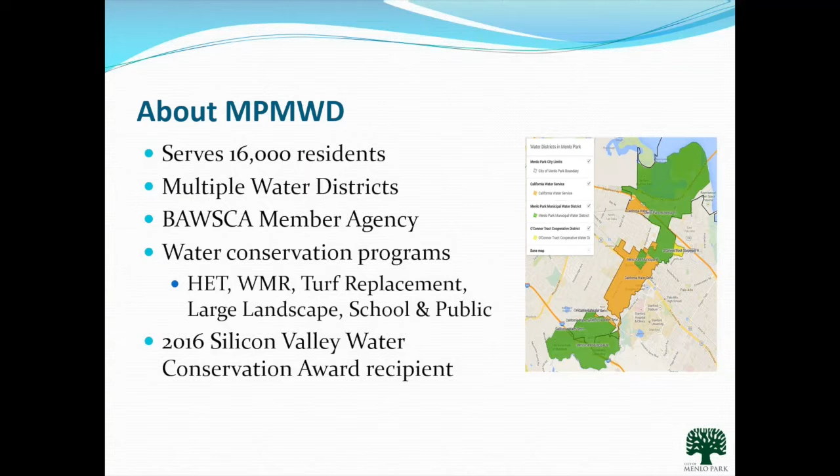A little bit of background on how Conserve-A-Scape was created: we began implementing the Lawn Be Gone rebate program in fiscal year 2012-2013. Back then we had only 2 participants, and we were trying to figure out how we can get people more interested in the program. We also realized that it may take a while for folks to get familiar with the program, and that landscape design and converting your landscape can be a significant cost.

Going into fiscal year 13-14, we only had 5 participants, so we really wanted to change that. We called and surveyed the previous participants for some feedback, and we identified that landscape design was the greatest barrier.

A lot of folks were interested in the program and had the budget to do so, but they were getting stuck after our pre-inspection phase, which is when they need to design what their vision is going to look like. They're really excited about it, but the execution was really hard to envision. So as the next step, staff went back to City Council to request approval for the development of a new program for landscape design to fill that gap in education.

We also realized that homeowners may not have the knowledge or know-how to go from a lawn to what you see in the picture here as an example, putting in plant palettes that work together, putting together an efficient irrigation system that would make sure those plants thrive for a very long time.

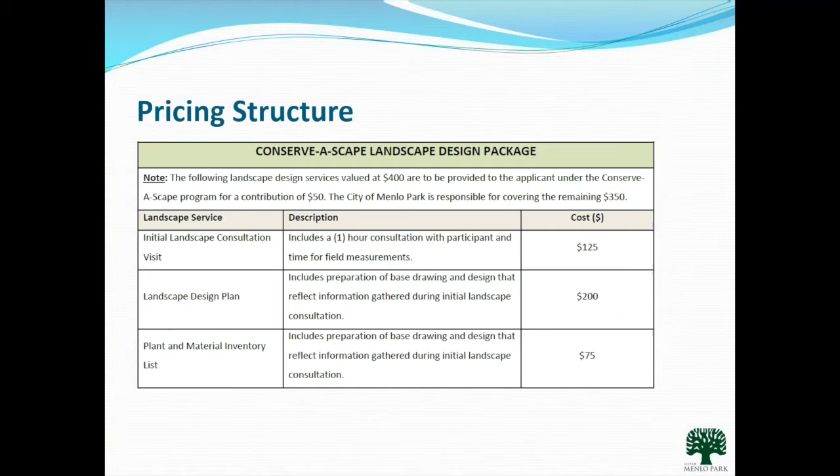We did want to allow some flexibility in the program for additional services on top of the $400 that the city covers. This is for cases where the resident wants to go above and beyond the initial design plan provided to them, or wants more of an extended scope.

What would warrant these additional charges would be, for example, if the resident gets their design and says it's not quite what I was looking for, I want it completely redrawn. We do allow that with additional costs and services — a complete redraw would be around $150. Any of these additional services would have to be covered at the expense of the resident.

For example, the city has a water efficient landscaping ordinance in which 80% of the entire conversion has to consist of plants. So usually this review takes 2 to 3 weeks.

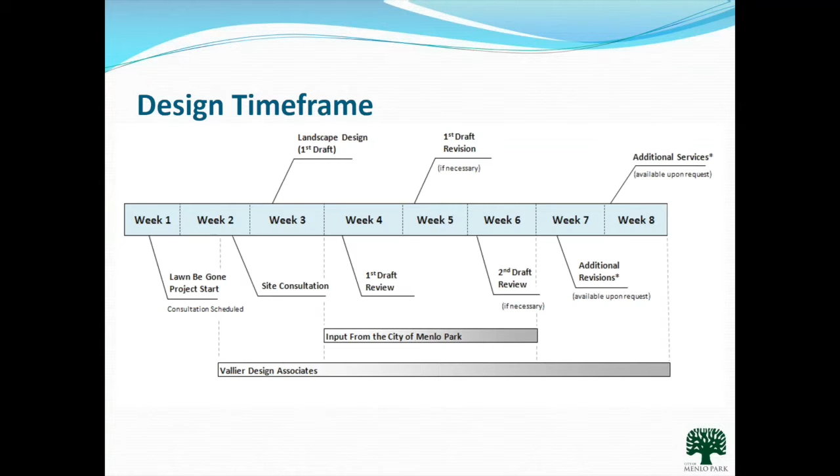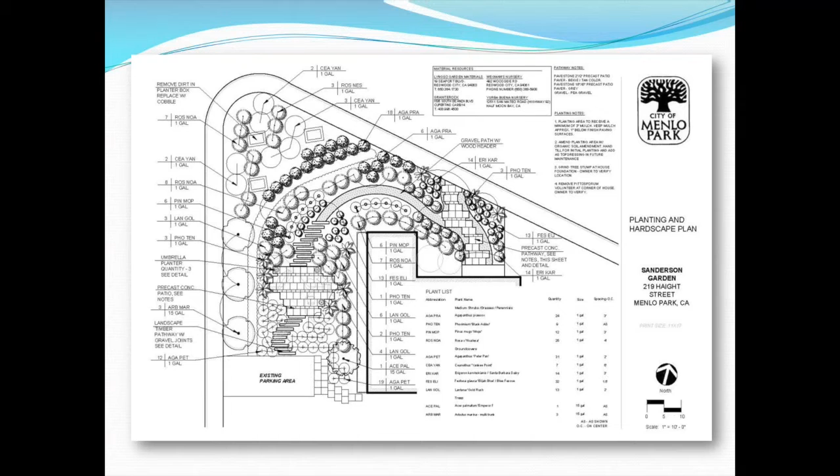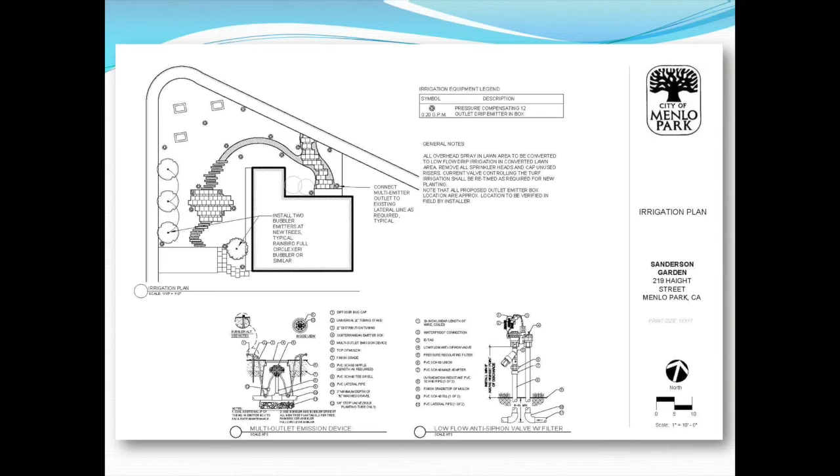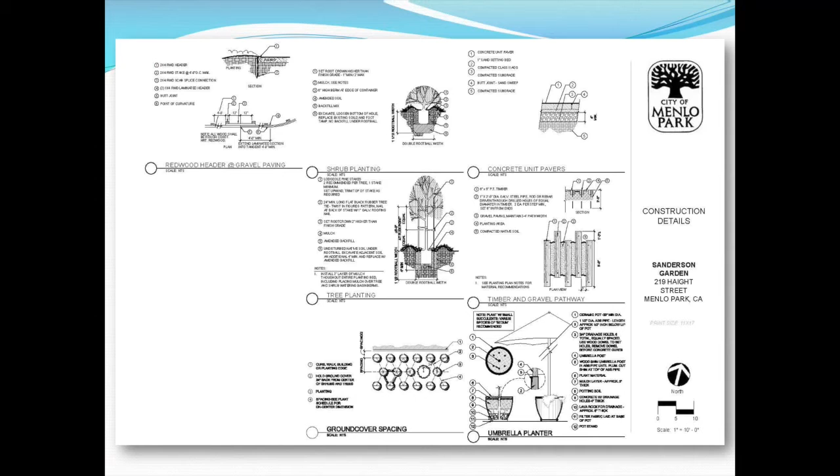There's also additional construction details if there are extra elements included in the plan, such as an umbrella planter shown on the bottom right of this construction detail sheet. Dry rock stream beds, for example, are very popular in our conversions, and sometimes there are details on how to include those, what type of rocks and spacing.

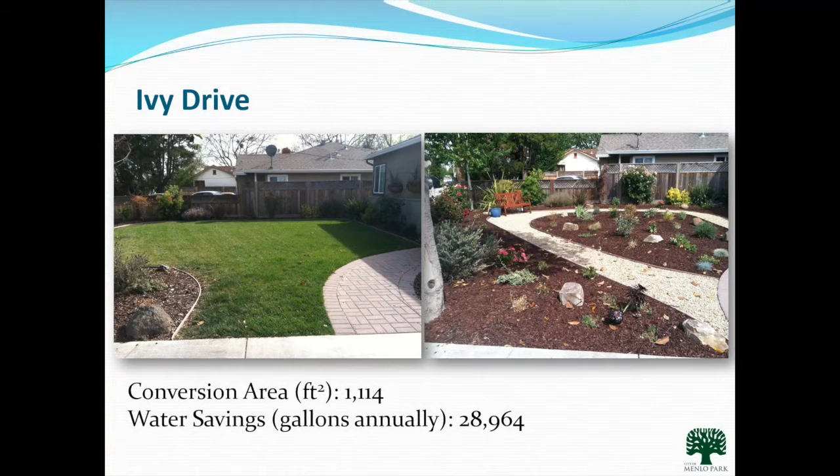The residents also let us know that a lot of neighbors have walked by, some of which have applications in the system to convert their lawn.

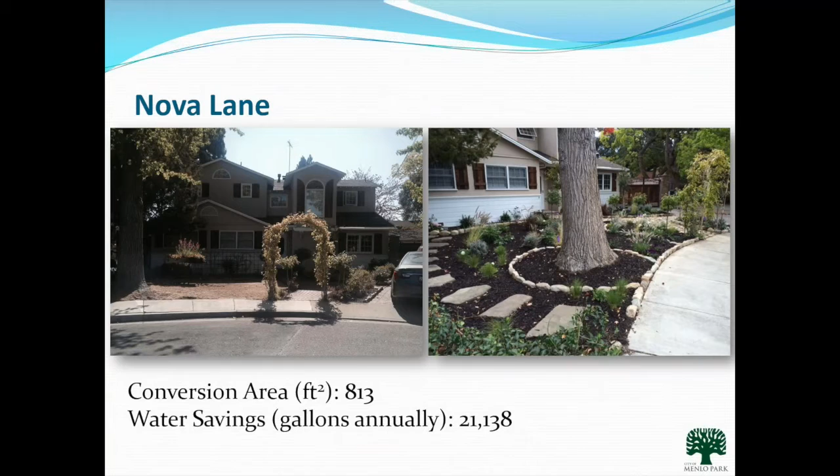There's different types of mulch you can use, different types of plants. Some folks have also incorporated edibles as well. They wanted to show a range of that.

Lawn Be Gone conversion participation, post-ConservaScape implementation. As previously mentioned, the first two years we had two and five residential projects completed. 2014 is when we started the ConservaScape program, and we got 11 participants. That has now jumped up to 40 residential participants, and it's not the end of the fiscal year. In these counts, I did not include projects that are currently in progress.

So, lessons learned and tips. We currently have the program set up to be a cluster. The consultant is in the San Rafael area, and so we initially decided to book two days out of the week, Tuesdays and Thursdays from 10 a.m. to about 2 p.m. for the appointments. We now understand that that's very cost prohibitive.

We wanted to be mindful of the consultant as well with the travel time. So what I suggest is, if there are other agencies interested in participating or starting a program such as this, maybe employ someone local that can either be on call, or when you go out and look at the bids, maybe employ more than one consultant.

Establish clear program guidelines. The lawn conversion process can be overwhelming, which we've been told, and we want to make it as easy as possible. Most of our outreach, it used to be we want to get all the details in there, but it's now been broken down to a minimum of 5 steps, and here's the references if you want to further look into the terms, so as not to overwhelm people up front.

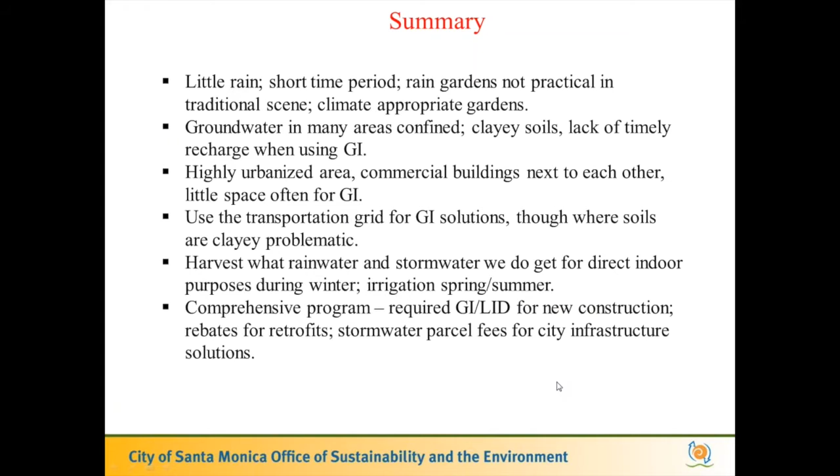Thank you, Neil. Neil is the Watershed Section Supervisor and Watershed Management Coordinator for the City of Santa Monica. He works for their Office of Sustainability and the Environment. He's been with the City of Santa Monica since 1999, so he knows what's going on in the city. On the side, he also is on the editorial board for the Watershed Science Bulletin. In City of Santa Monica, he oversees water conservation and efficiency programs. He also does watershed management programs. Everything he does is geared towards reducing water pollution and using water sustainably.

Before joining the City of Santa Monica, he was with the Jacques Cousteau Society for nearly a decade researching global water issues for different media. So without further ado, this is Neil Shapiro talking about water capture, use, and quality. Thank you.

Great. Thank you for inviting me. Thank CivicSpark and the group for having me. Love to talk about all the stuff that I'm involved in. And we have a similar program to what Vanessa talked about in Menlo Park. We have an extensive water conservation program run by a different section of colleagues, so there's lots of information about that on our website. So I'm going to talk about managing our watershed and stormwater rainwater harvesting in our city. That's my focus.

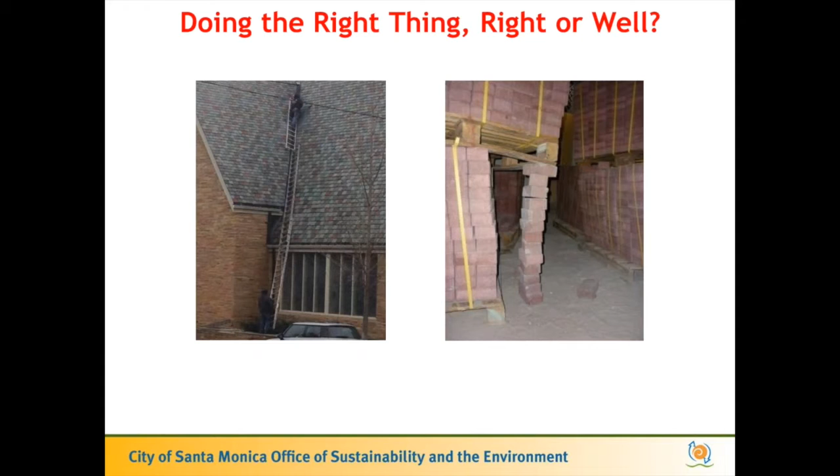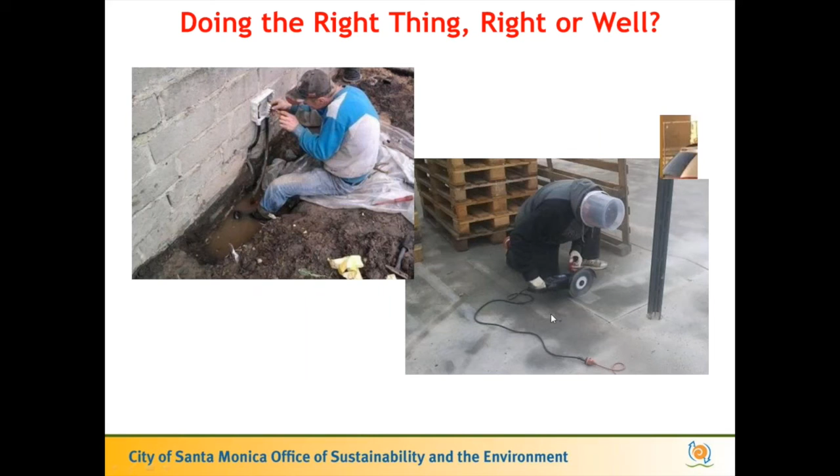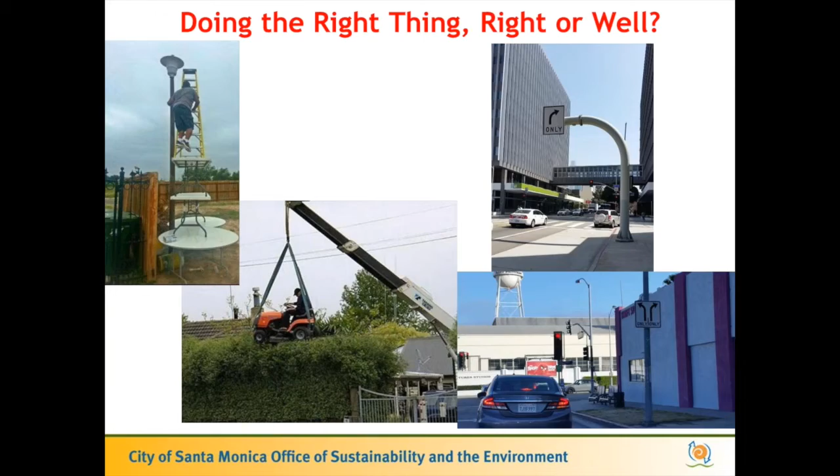So I'll talk introduction to the problem, and then I'll talk about different approaches we have, and I'll show you lots of examples. And I know I have a short amount of time, but I'll show you lots of examples of things that we're doing in our city.

So we're all familiar with, cities have paved over, urban areas have paved over the land, and as a result, when it rains, most of the rainwater now flows off into our surface water bodies and cannot percolate into the ground and into groundwater. So that's become a problem, and it carries pollutants. And there's been lots of studies around the country documenting that urban runoff is the single largest source of water pollution in our country. So that's a significant problem, certainly for our city.

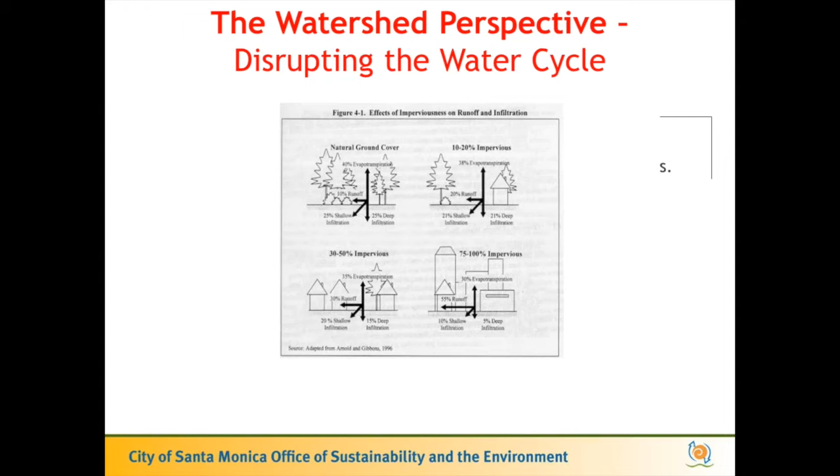We're a beach community. We depend on a clean beach, clean waters for people coming, visitors, and tourism coming and helping our economy. Our city, for those who may not know, we're right on the ocean, Santa Monica Bay, surrounded on three sides by Los Angeles. Highly urbanized. We can't expand our city, so any construction is just new construction to replace buildings. We have separate sanitary sewer and stormwater systems, so we don't have a combined system.

There are a number of TMDLs for our area that have a lot of different requirements, which maybe the next speaker might talk about in terms of requirements for the stormwater permit, NPDES permit. And we don't get very much rain here. And so we want to make sure we maximize the limited water resources we have and try and maximize the local on-site water resources we have.

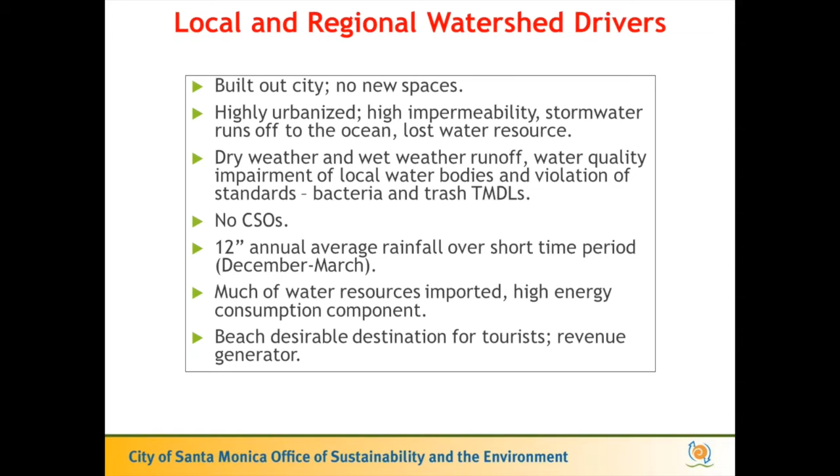So when we look at solutions, or at least in my area, we want to look for solutions that have multiple benefits. So for example, in the mid-'80s, early '90s, when we were complying with various regulations for stormwater, everyone was looking for a solution that dealt with water quality, treat the water, discharge it. However, there are solutions that can take care of both problems, and that's where we get into low impact development, design strategy, green infrastructure solutions. And this is an example here.

NRDC did a study looking at different solutions where you can harvest your on-site water, treat it, use it on-site, don't discharge it, and that way you solve water quality and water quantity problems. So that's our strategy in our city. We want to mimic nature, work with the water cycle, use all these latest sustainable technologies and design strategies to be proactive in protecting our watershed. Don't look at stormwater as a waste product, but as a resource. And so focusing on solutions that give us lots of benefits.

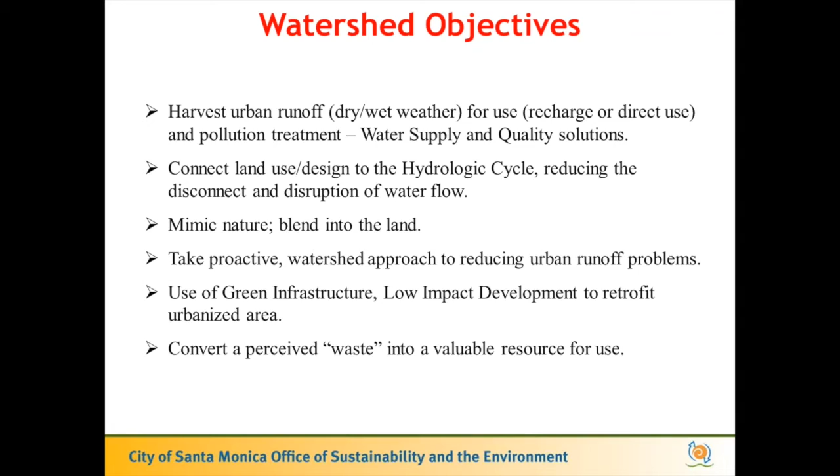And to help me do that kind of work, we have our urban runoff mitigation ordinance that we've had since the mid-90s, and all this is available online on our website and our municipal code. So anyone who's doing new construction or major construction, they have to construct a post-construction BMP, a structure to collect the rainwater and keep it on site. And then we have 2 stormwater parcel fees in our city that bring in about $4 million a year that help us do a lot of our programs to keep our ocean waters clean.

Like most cities, probably around the country, certainly in California, back in the late 80s, early 90s through the 90s, we started at the bottom of this hierarchy of solutions. Detention was the main solution, just hold the stormwater on site and then discharge it after it's dropped out sediment and any pollutants attached to that. Then we started getting into proprietary solutions. Companies started developing these separation screen filtering systems to remove gross solids and sediments.

Then we got into more complicated filtration. Then we started looking into plants to help filter, until we've worked up to the top of the hierarchy, where our focus is now on rainwater harvesting. As I said, that accomplishes both water quality and water quantity solutions, and it's the most sustainable solution. So that's where our programs are directed now.

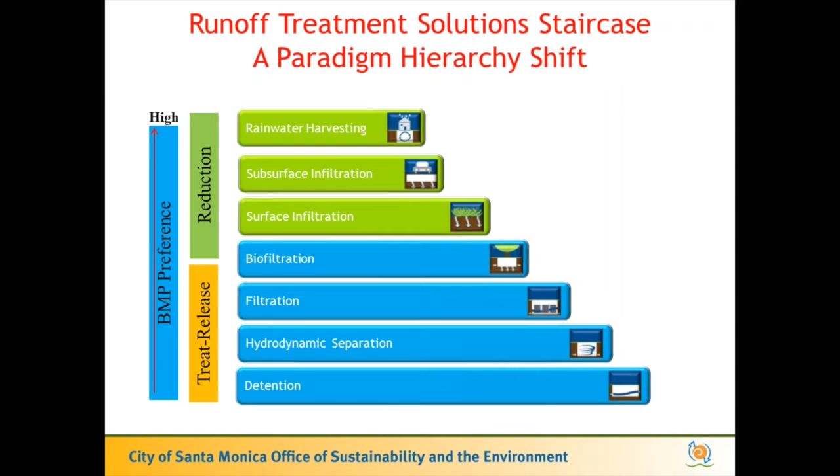And so I'll start by talking about some examples. These are passive examples where we just allow the water to be harvested and infiltrate into the ground. So we have an ongoing program for greening our alleys. We might do 10 to 20 alleys a year, just part of our regular CIP program, part of our regular capital improvement program where we're using alleys.

And when we do that, we're putting pervious concrete center swales, so as the water is flowing down the alley, whether it's just the alley water or the roofs of adjacent buildings, that water is going to go into this pervious concrete and soak into the ground. So you can see the top right, the sheen on the impervious asphalt, and then you don't see the sheen for the pervious concrete because the water is soaking in. So this is an ongoing program.

We're also going to be doing this at intersections where we have concrete swales going across these intersections, another good place where we can put the product and allow nuisance water to infiltrate into the ground, and also during storms, the rainwater go in.

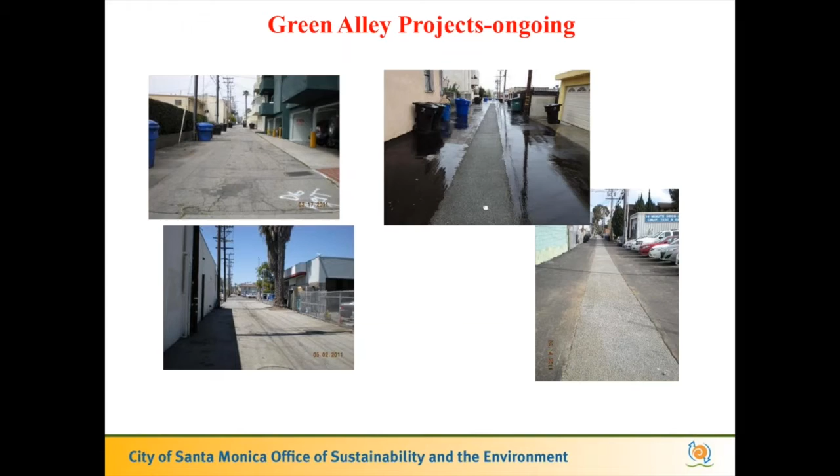We also have an ongoing program when we're redoing either streets or just the curb and gutter. We're putting in pervious concrete again. As the water sheet flows off the crowned streets, it obviously goes into the gutter, and all the water is right there, so it makes sense that we could have some percolation going on there to get that water back into the ground.

This is an important maintenance point: since most of our streets are lined with trees, we get a lot of tree droppings, a lot of stuff coming off the streets. You want to make sure you have a good maintenance program, a good street sweeping or a vacuuming program so that these locations are cleaned properly at least once or twice a year, so you don't get sediment filling in the voids, and therefore the product will malfunction when you fill in those voids and you don't get percolation.

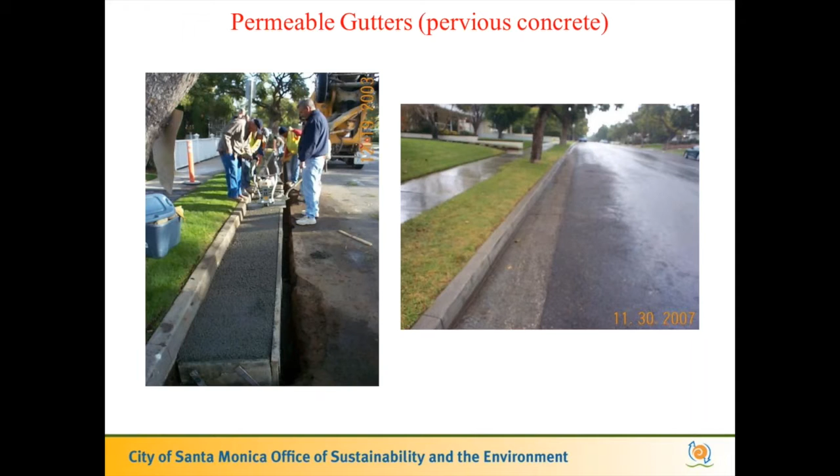We did a demonstration project many years ago where we looked for a narrow parkway here on the left side, and we had a gutter on the right side. This street is San Vicente on the north part of our city. Again, we thought, well, maybe we can harvest the water flowing down gutters instead of putting in pervious concrete. Just add a catch basin at a location at the bottom of a drainage area, collect the water through this catch basin on the right. It goes through an insert filter to filter out debris, sediment, and then the water, after it goes through that filter, goes into that infiltration zone under the parkway.

So in this case, it's filled in with these plastic boxes. There's a variety of products out there, and I'll show you examples shortly. So instead of using rock, we use these plastic products. So that way we get 95% void, and then we can store more water in them. So successful in demonstrating that strategy of extracting stormwater flowing in the gutter and putting it either in the parkway or perhaps somewhere else.

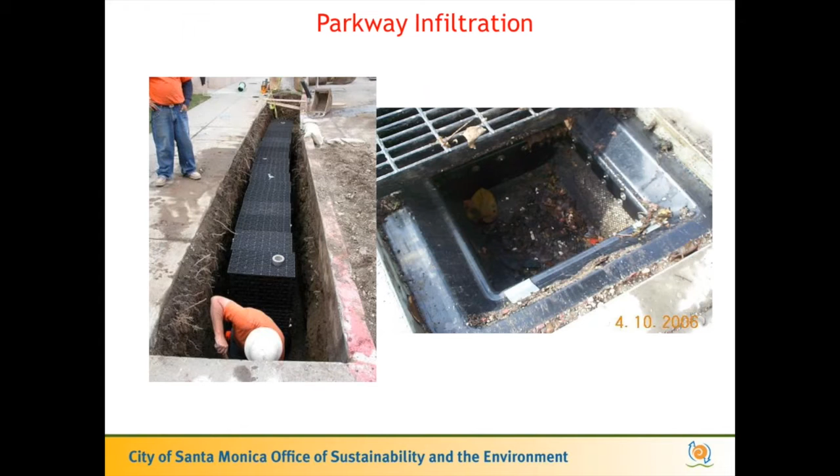And so that somewhere else, we got a grant recently from the state to do what we call an inline stormwater harvesting program. We selected 3 sites in the city. This slide is showing 2 of the sites in one residential area. So instead of adding a catch basin, which is what the previous slide showed, we found existing catch basins. The bottom left shows the existing catch basin, and we tapped in that catch basin, modified it with a little diversion, and so when the stormwater comes off the gutter in the storm drain, it's diverted not into the pipe that goes in the storm drain system, but it goes into an infiltration zone.

Top left picture, which was similar to the previous slide, where the water can infiltrate underneath the parkway. And the middle slide is just showing some of the monitoring and access points for that. We had to do a bunch of monitoring of storms to show that this was an effective solution.

On the right side, we tested another strategy. Instead of putting the water under the parkway, we actually augered down, top right slide. You can see the manhole cover, the utility cover, and that's an augered silo about 30 feet deep. So the water is removed from the storm drain. It's filtered of any trash and debris, and then the water goes into this 30-foot water silo and percolates into the ground.

And we have signage so that people in the area will see what's going on and learn what we're doing.

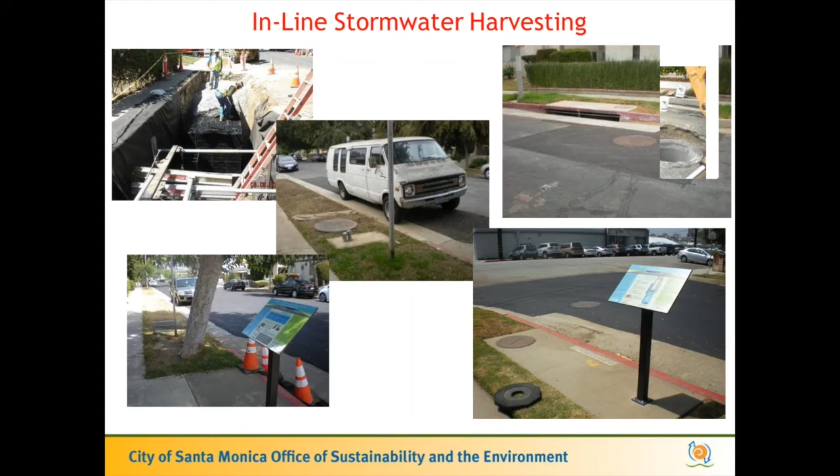The third location was on another part of the city, the south part. We actually tapped into the storm drain line, not a catch basin. The bottom left slide highlights the utility cover, where the storm drain makes a turn coming from an alley onto Hill Street. We diverted the water out of this pipe, and the middle top slide shows this diversion, a little dam where the water is removed from the storm drain line and sent to the left.

We have two augered pits, shown top right. The first removes trash and debris, and the second is our infiltration zone. The left top slide shows the augered water silo. The bottom right again shows some signage, and this car is covering over where that infiltration zone is. We think this is a very effective solution and look forward to doing many more of these.

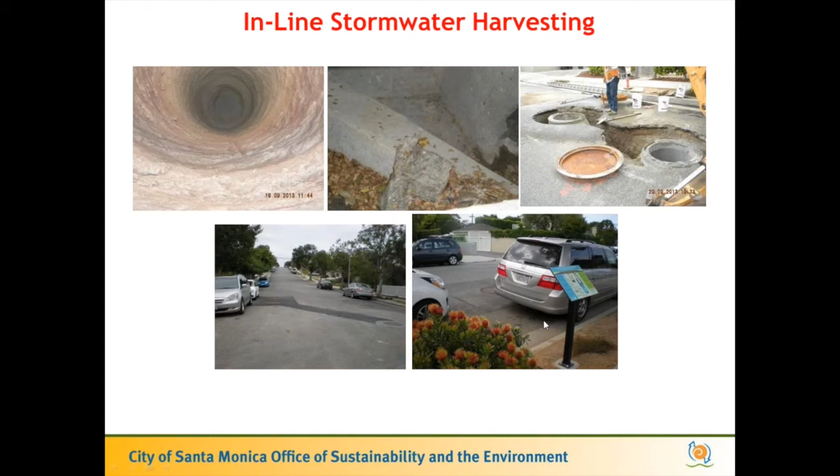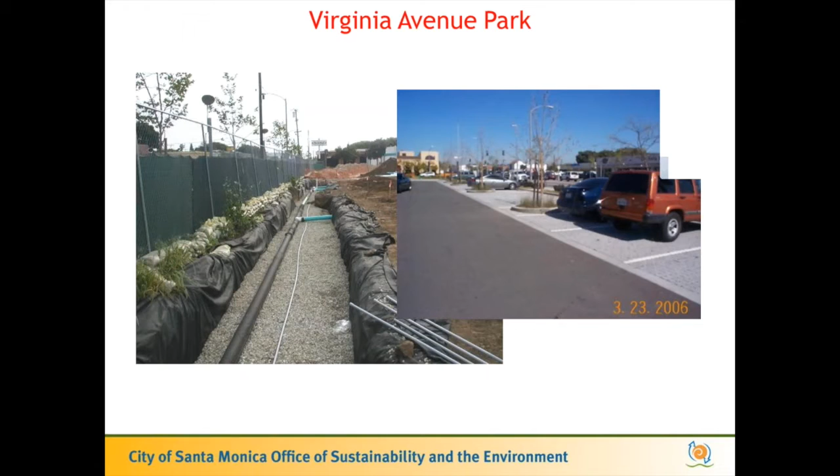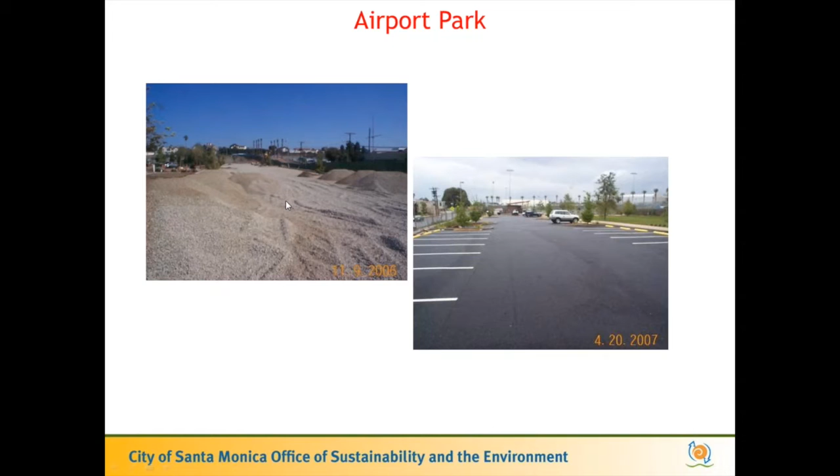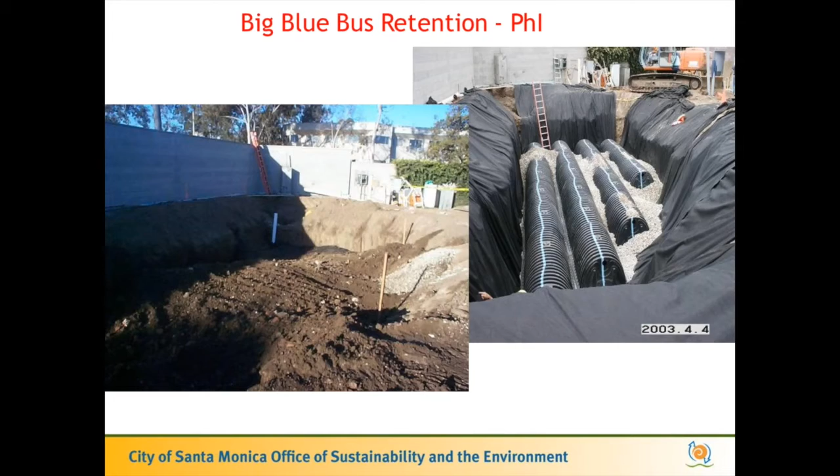Our city has its own Big Blue Bus transit system, so we rebuilt the facility over two phases. The first phase, at one end, included a big infiltration zone to collect rainwater coming off some of the hard surfaces and buildings. A couple years later, they redid about two-thirds of the other end, where all the buses are parked, along with additional facilities.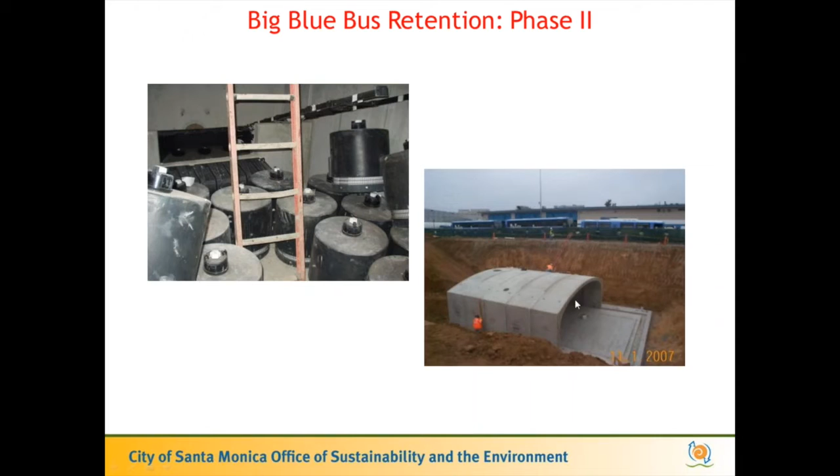They put in a dual system that includes, top left, a storm filter—all these canisters have different media in them to filter out a variety of pollutants such as heavy metals, which would be more common at this type of facility. After that, the water is detained in a concrete vault, and from there it's bled off into an infiltration zone where it infiltrates into the ground.

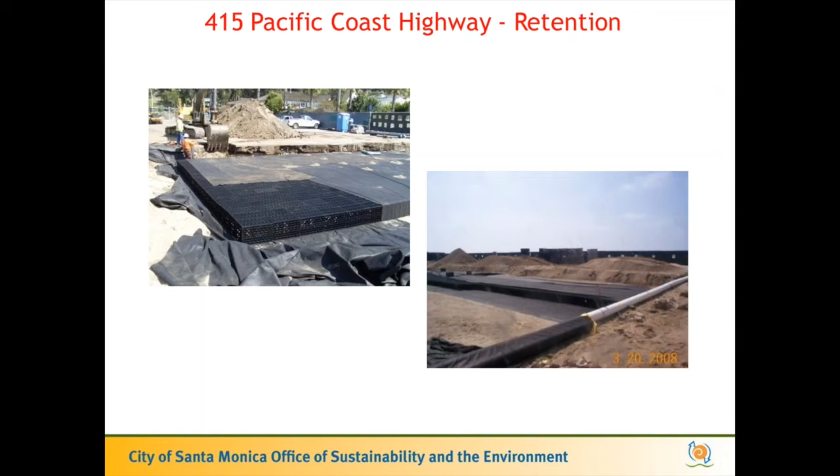There's the Annenberg facility, a kind of famous facility on our beach used for a variety of activities. There's an infiltration zone actually in the beach and sandy area, so good percolation, and all the stormwater coming off that facility gets infiltrated there.

We got another grant to test out converting some parking lots into a more permeable, multi-beneficial use facility. In our city we have a number of parks, but because we're built out we can't add any more, and we really want to increase the ability of people to recreate around the city. So we converted one-third of this beach parking lot.

We removed the asphalt and put in a product called Netlon, a grassy product with a base that makes it structurally sound so you can park on it. When it's not used for parking, which is most of the year, we prevent cars from parking on it, and people can do a variety of sports or activities, or just relax there.

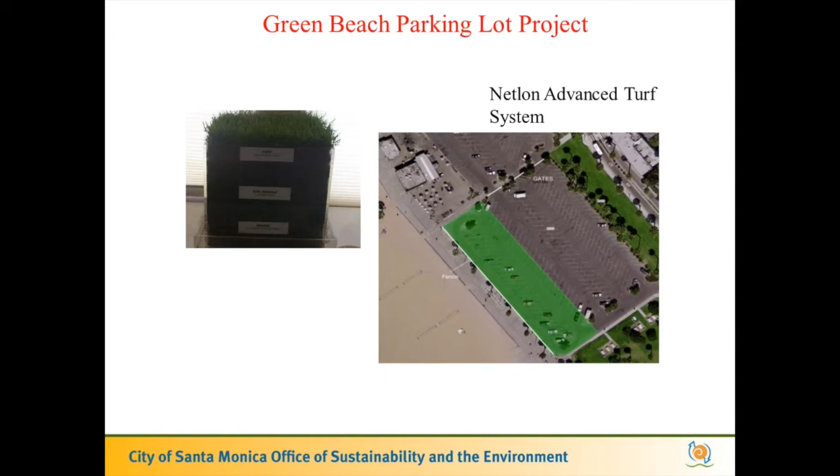We didn't get enough money from the grant, so we didn't put in a cistern, but it would have been nice because we actually added more turf to the facility, which means more watering. That goes against our strategy of being more water efficient, although it does have an efficient irrigation system. That's something to keep in mind, where you have to balance the various needs of a city.

Here are other examples of different plastic products. I've put the names of them in case you want to look them up, and there's information on our website about them. So again, all kinds of different products are out there.

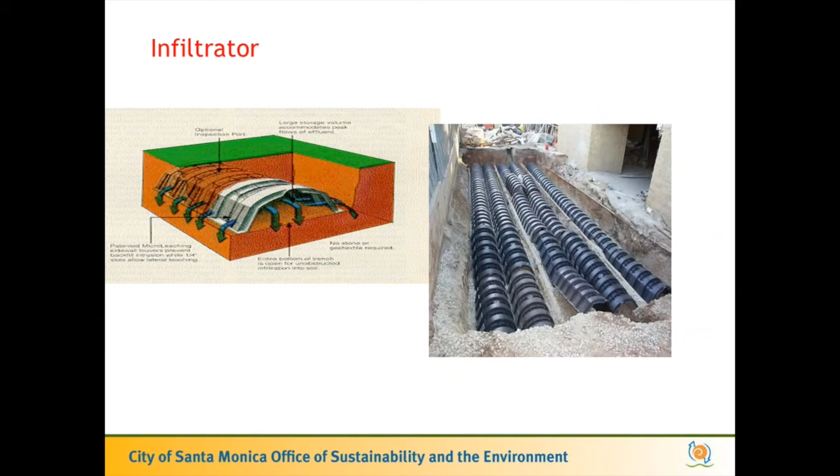These plastic boxes I've been showing can have a shallow footprint or a deep, big footprint for installation, or you can have a shallow depth but a big footprint with these concave products that are very effective. It just depends on your site, and you want to tailor your products to it. With this one, you can actually stack the concave devices after you backfill with gravel.

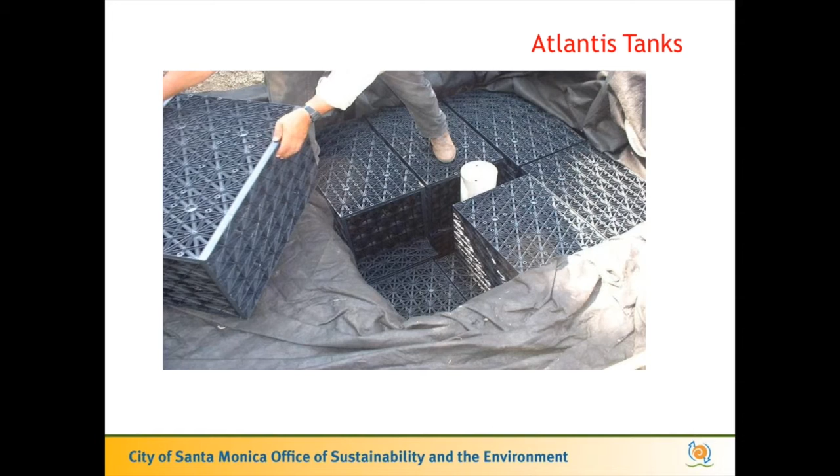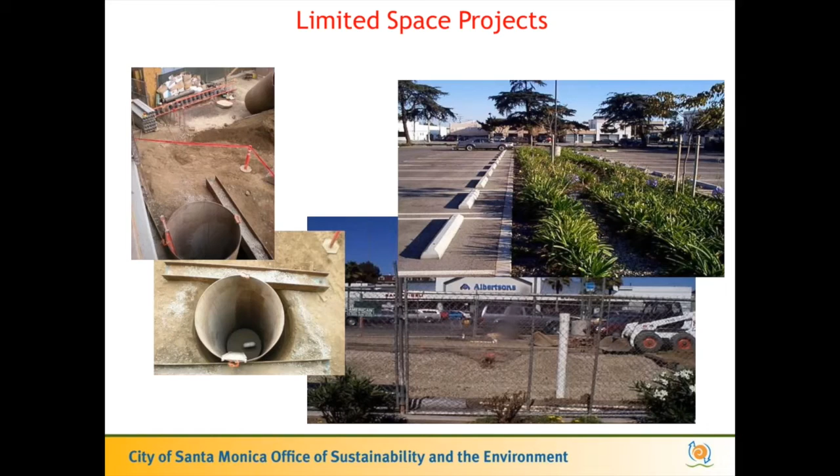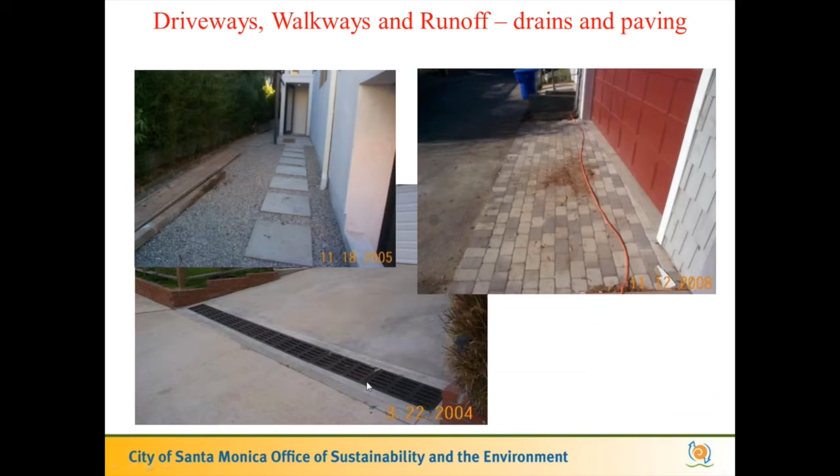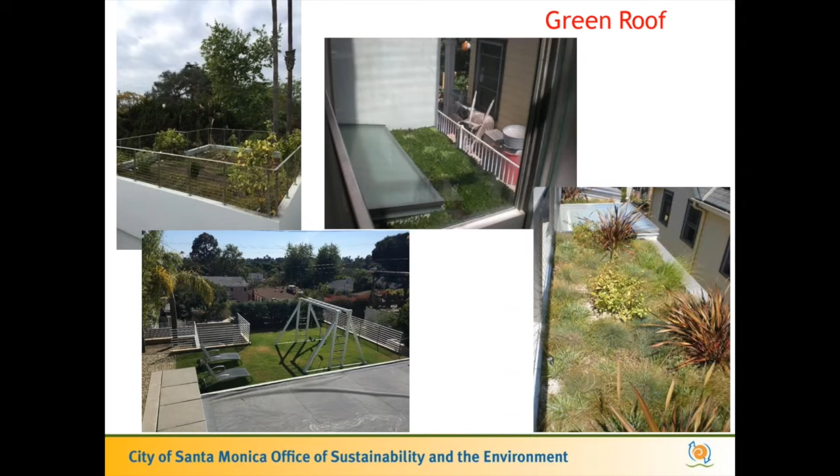We're starting to get some green roofs in our city. These aren't as practical a solution because, depending on what you plant them with, you may have to irrigate them during the dry season, which requires more water, so you have to think carefully about that. If you put in a cistern to collect the water and then use drip irrigation, you can obviously water your green roof during the dry season.

As we move away from passive solutions and into more direct or active solutions to keep the water on site and use it for beneficial purposes, besides requiring people to install these during construction, for retrofits we also offer rebates to redirect your downspout. Here, different downspouts have been disconnected from pipes that go to the curb and instead send the water to the landscape. This is still a passive solution, but we pay up to $40 for that.

We also have rebates for rain barrels and cisterns. For rain barrels, we give up to $200. For small cisterns, $500. For larger cisterns, we give up to $2,000.

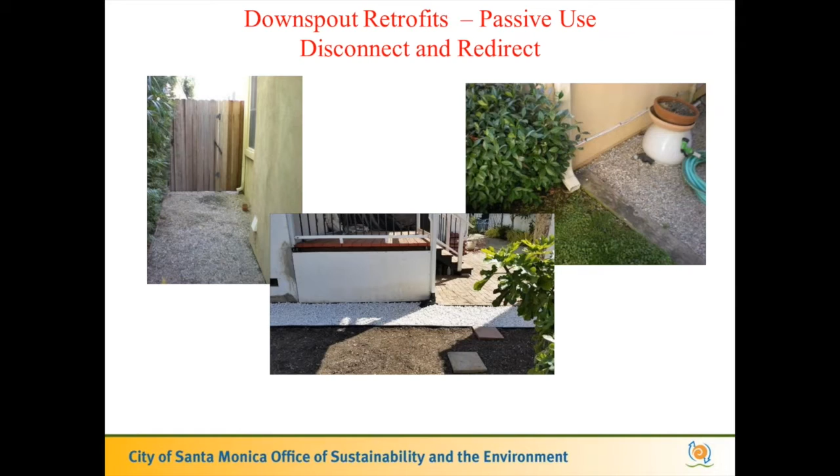Again, the water can be collected on site and used for landscape irrigation, and these come in all kinds of different shapes and sizes. You've probably seen that. The one on the top right is kind of cool, it's a slimline. So if you don't have a lot of space on the side of your property but still want access to it, you can put in this type of cistern; it hugs the wall and has a big footprint but doesn't stick out.

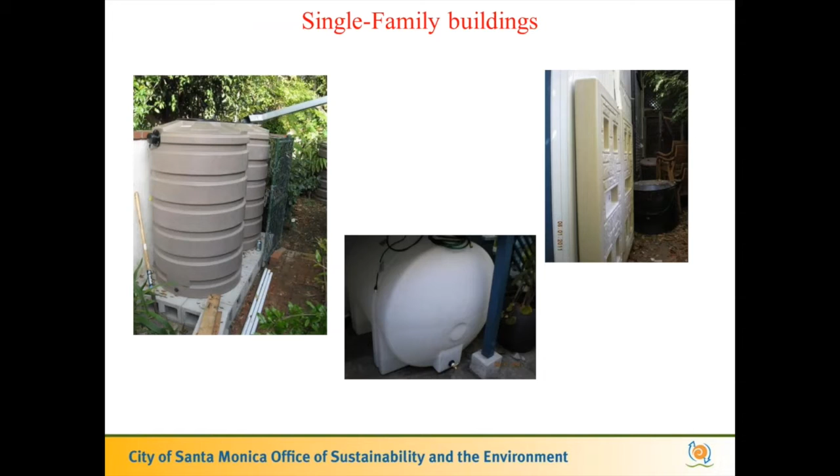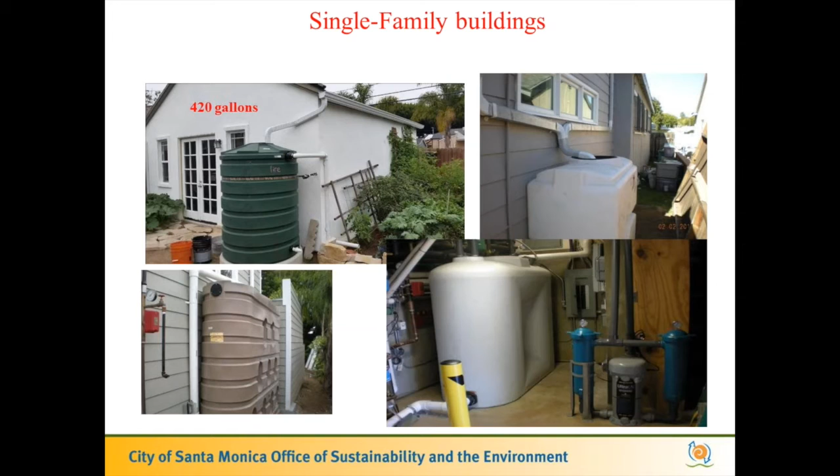All kinds of shapes and sizes, so a very successful program in our city putting these in. Some homes have been putting in 5,000-gallon cisterns to use the water for irrigation. This multifamily project actually uses plastic boxes as a 5,000-gallon cistern underneath the front of their property, used for landscape irrigation. This particular project matched the landscape plant species to the water needs from the cistern, so in theory they collect enough water from a couple storms to get them through the dry season.

Multifamily with a bunch of cisterns. This is our main library, where we put in a 200,000-gallon cistern to use the water for irrigation. We were going to use it for flushing too, but this was added at the end of the project, so we weren't able to get it in with the design team.

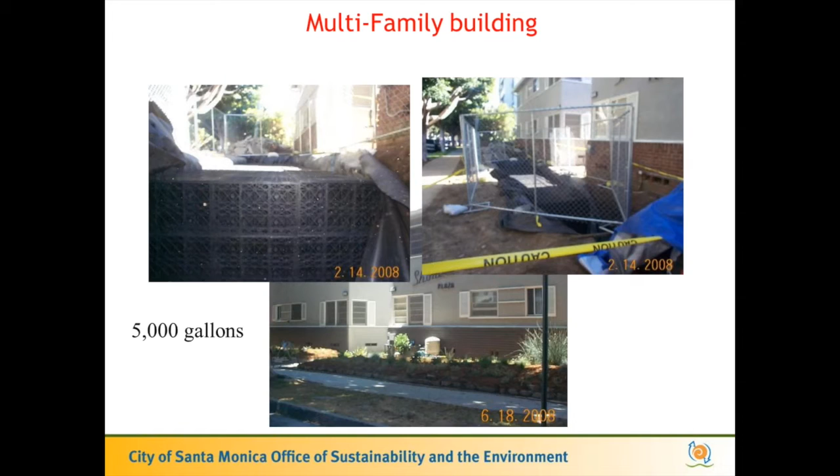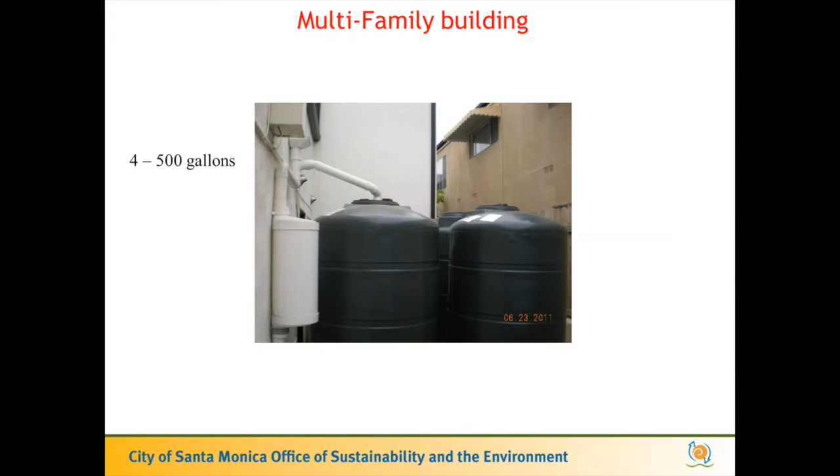Another city multifamily project has a 5,000 gallon cistern for irrigation. This is one of our latest projects, our new library, with a 12,000 gallon cistern where the water is used for indoor flushing only. We're very excited about this, we've kind of broken the barrier to actually using rainwater inside, which has been a challenge at LA County, dealing with our public health and public safety officials to get permission to do that.

This is a treatment system, and it goes through different systems: sand filter, microfiltration, disinfection. We also have signage and educational information to show people what's going on so they can learn about this.

We have a new light rail that goes through our city, just opened up a couple weeks ago, our Expo line, and they have a maintenance facility in our city. They put in a 400,000 gallon cistern system, and they use that water for high pressure cleaning of equipment.

We'll also be building another project at the end of this summer at Los Amigos Park. There's a storm drain that runs underneath the street right next to it, so we're going to tap into that, put the water in a big cistern, and use it for irrigating the field and for flushing the bathrooms at the athletic field.

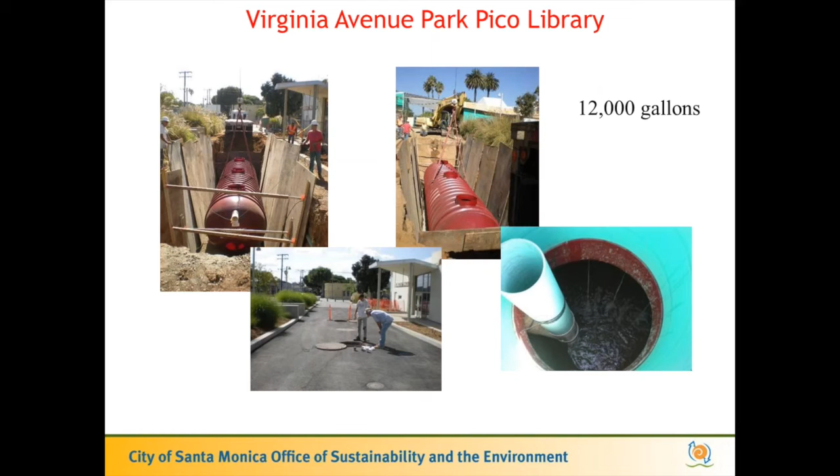Thank you, Megan, and it's an honor to be here. I'm just so impressed with every CivicSpark member I've met, and I'm so grateful for you all dedicating a year to community service.

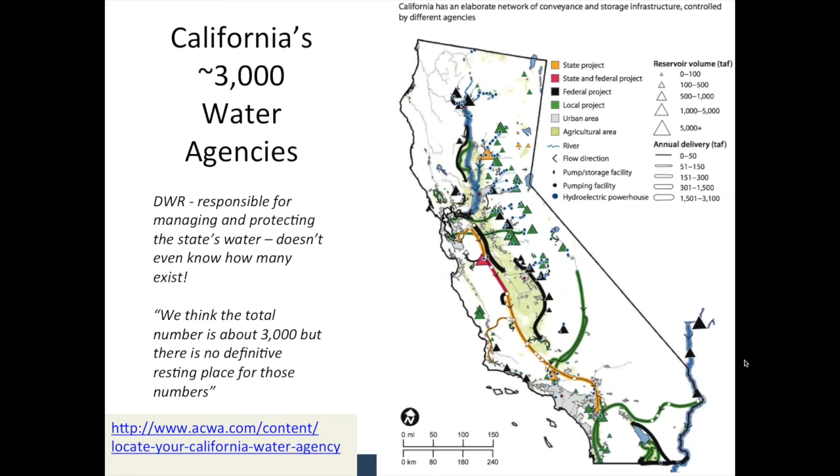So first, regarding local water supply and management, I'll give you a second to digest this map. California water management is incredibly complex. We actually have over 3,000 local water agencies in the state, and we don't know exactly how many there are. The Department of Water Resources, the statewide agency responsible for managing all these agencies, doesn't even have an accurate count, which is kind of scary for such an important resource. I had a professor in graduate school who liked to say that in California we hate big government so much that we'd rather create thousands of little ones. This is a perfect example of that. Every local municipality may have multiple water suppliers and multiple agencies managing every aspect of water management, from water supply, wastewater, water quality, ecosystem flows, you name it.

They have multiple agencies to cover every single potential use of water. But some of the most acute needs that local communities face are safe drinking water, reliable water supply for irrigation, reliable water supply for human or urban use, sewage contamination and wastewater treatment, stormwater mitigation, and demand management.

So I'll give you a brief overview of each of these. The first one being safe drinking water. There are many communities across the state, especially in the San Joaquin Valley and some of our more rural areas, that actually do not have access to safe, reliable drinking water. Some of those communities have had to go as far as to pay to truck in bottled water to provide to their residents because their aquifer is contaminated or the infrastructure they have is so old and deteriorated that the water is unsafe to drink.

Some of the more innovative solutions for addressing that issue are new technologies on the end user, so putting in some sort of treatment mechanism. There are very high-tech models and very low-tech models that can be installed in single-family homes, multifamily homes, and commercial buildings that will treat the water to drinking water quality on a regular basis.

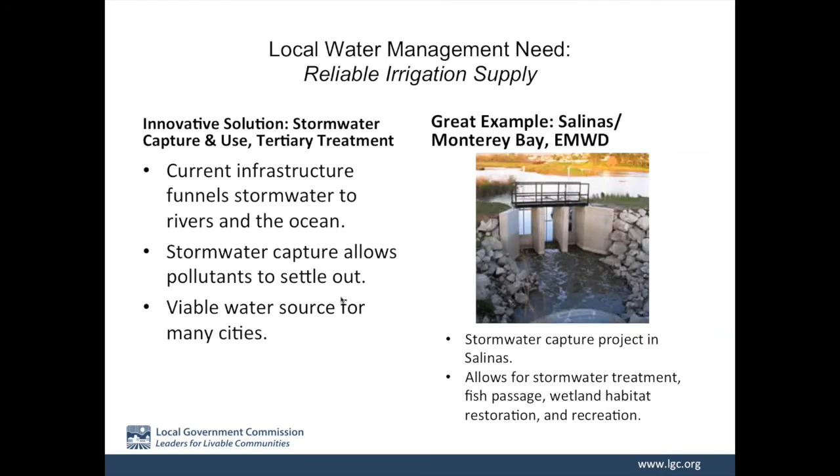A new technology that's very promising is the use of biodigesters, where they take the wastewater and separate the waste from it and turn that into an organic matter that can be added to fertilizers and become a very viable, high-quality fertilizing material. It also cleans up the water, and in the process creates combustible gas that you can then use for energy.

An example of this is in Sonoma County. St. Anthony's Organic Dairy Farm is producing enough biogas to almost run their entire farm's energy needs on the property, and also reusing the fertilizer to grow their crops.

Next is stormwater mitigation. Neil talked a great deal about this, so I won't spend a lot of time on it. Stormwater was considered a source of pollution in the state for a very long time. I think Neil expected me to go over the regulations that govern stormwater in the state. Because of time, I don't want to go into too much detail, but there's something called MS4,

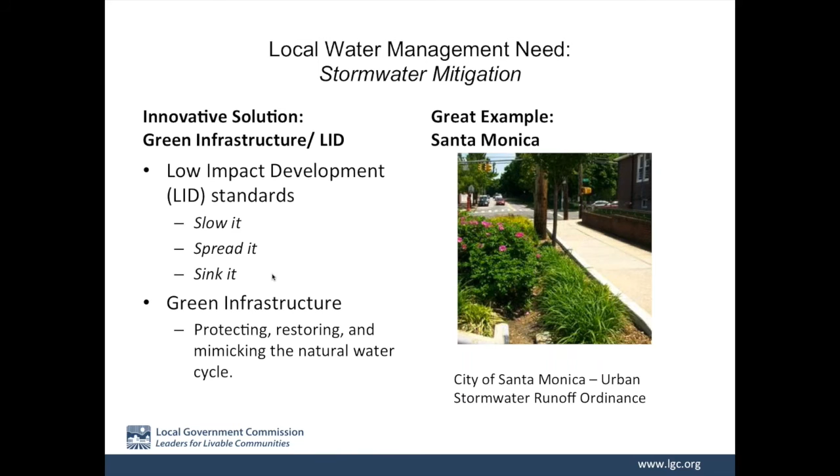And what I personally think is one of our biggest critical issues in California is demand management, or the fact that in California we are demanding more water than we can actually provide. And that comes down to the end user and our individual personal practices. We use far more water than we actually need to. In California, the average person uses about 250 gallons a day. The national average is 100 to 150 gallons per person per day. So we're already exceeding the national average, and internationally it's well under 50 gallons per person per day.

So cities and counties are required to provide water to their residents, and because of some of our regulatory and policy structures in the state that I'll get into later, our water is priced very low, so there isn't a whole lot of incentive to reduce our water use. But as you're all aware, we're in our 5th year of extreme drought, and the state has asked us all to cut back and then gone as far as to require us to reduce our water use.

So what many organizations and many municipalities across the state are doing is providing incentive programs for water conservation. I believe Neil talked about some of their rebates, and Vanessa as well. There's rebate programs across the state to help the end user, the resident, reduce their water use at home, as well as to help businesses reduce their water use on site.

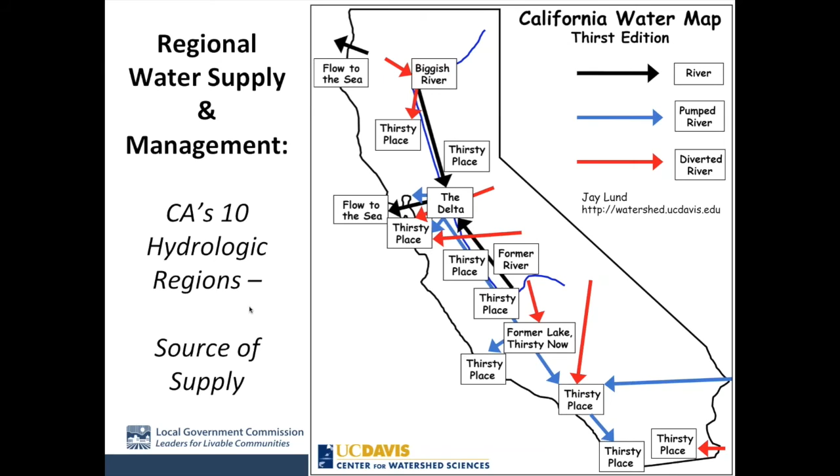I'm going to give you a second to digest this map and pretend I can hear your laughter. And I'll move on to a real map.

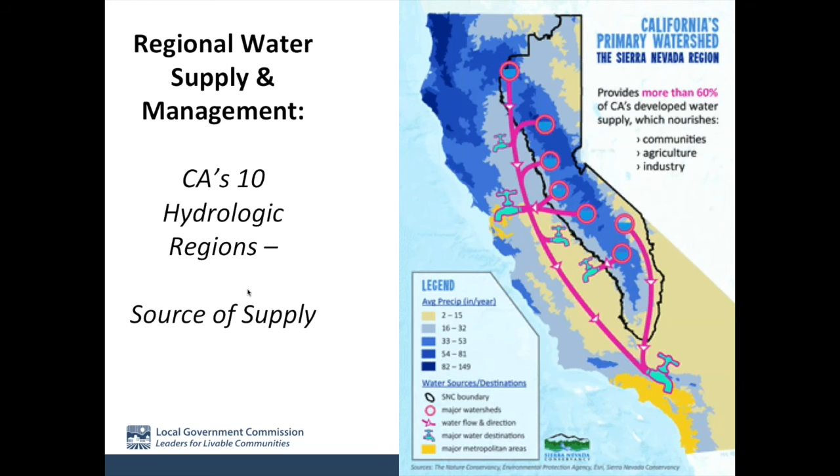But essentially, the dark blue regions are where all of our precipitation falls in the state, where water is collected. And the yellowish brown regions are the areas that receive very little precipitation. And because of our ingenuity in building infrastructure, especially back in the 30s and 40s, we have plumbed California so that we can now move water out of those hydrologic regions to feed thirstier areas from water-rich areas.

Region 2, the San Francisco Bay Area, their biggest threat is from sea level rise because they are so densely populated and urbanized right on the coast, and because of the San Francisco Bay Delta. As sea level rises, it's going to flood a huge proportion of that region, which will obviously destroy property.

The San Francisco Bay Area receives its water from the Sierras. It's piped in from Hetch Hetchy and the Feather River watershed and the Mokelumne watershed. So their other risk is more from seismic activity because San Francisco is very earthquake prone. But as far as climate change impacts, their biggest threat is sea level rise.

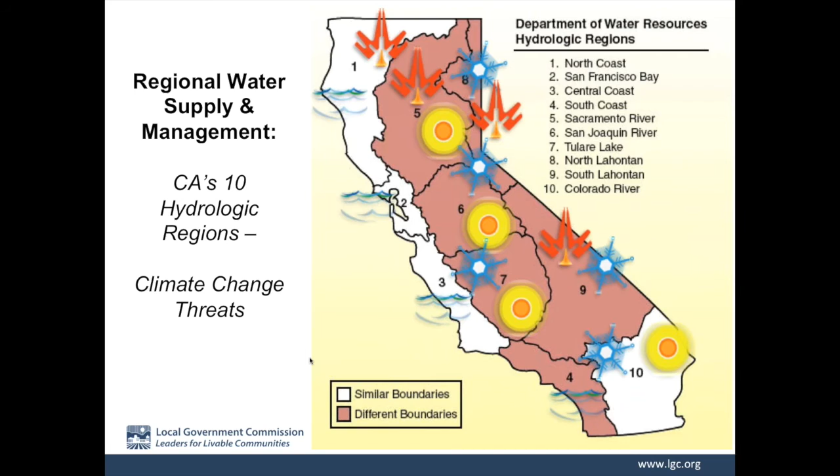So a little bit on each of the regions, their specific challenges, not necessarily climate change related, but in general, the local water management issues and actions. So the Northern California, we have the North Coast and the San Francisco Bay Area. They will have increased water demand due to population growth. In the North Coast, a big challenge is environmental flows and fish passage. There's many wild and scenic rivers up north, and they're constantly battling to protect those areas for environmental purposes.

Also, there is a lot of illegal marijuana growing and some legalized marijuana growing up in the North Coast region, but because it's not regulated, they are destroying and illegally diverting streams to irrigate their crops. And then, as I mentioned, the San Francisco Bay Area is faced with seismic risk. In the North Coast, they have addressed their environmental flows concerns and fish passage issues with lawsuits and local protection. The San Francisco Bay Area, they're focusing on conservation and diversifying their water supply.

The coastal regions, both the central and south coast, their biggest risks are saltwater intrusion, reliability of their water supply, and as the regions continue to grow, increasing demand for urban supply. This is where we're seeing most of the water recycling and reuse, as well as the real cutting edge on water conservation and water use efficiency.

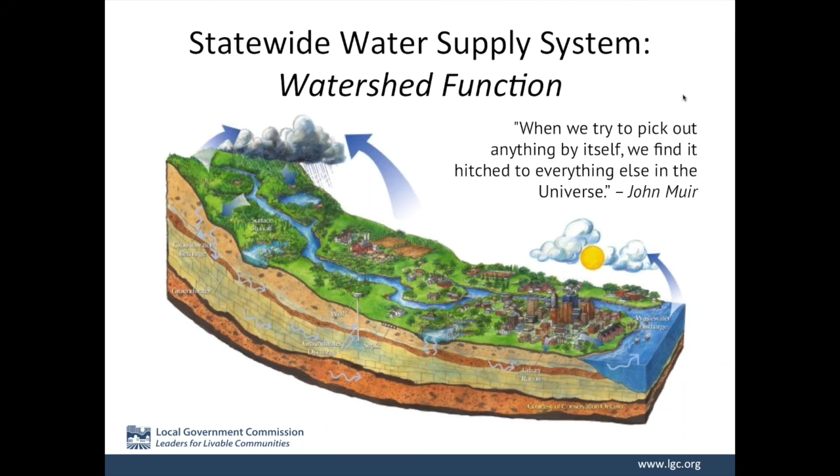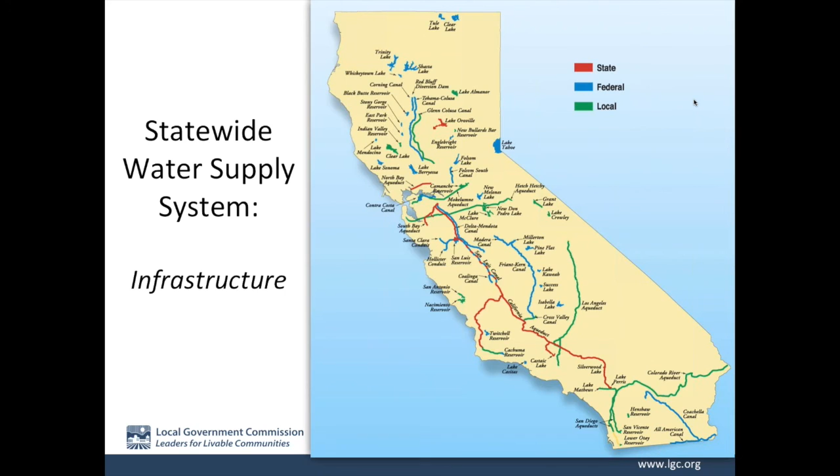But the North Coast is where a lot of our water is produced, and the Sierras is where a lot of our water is produced, and they're not necessarily using that water. It's being pumped out to other areas.

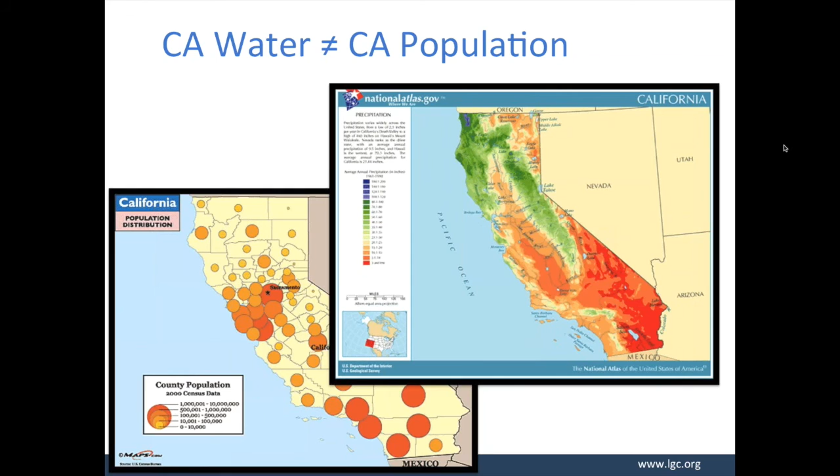Our state infrastructure and management and statewide water policy is managed by two agencies: the Department of Water Resources and the State Water Resources Control Board. The Department of Water Resources is a water supplier. They actually sell the water from the State Water Project to the water project contractors. They're also the managers of water supply across the state and set policy for water management and monitoring across the state. Whereas the Water Board is the regulatory agency and enforcement agency that handles water rights and water quality regulations. The State Water Board oversees 9 regional water boards. So that's the State Water Resources Control Board and then the 9 regional water quality control boards.

Quick primer on California water rights. One of the many reasons that California water is a mess is because we have a dual rights system. First, we have riparian rights, which is the more common water rights system used in most of the world. This came over from British common law into the eastern United States and across the country. So riparian rights is when your property has a stream or a water source running through it or abuts a water source, you have the right to use that water source.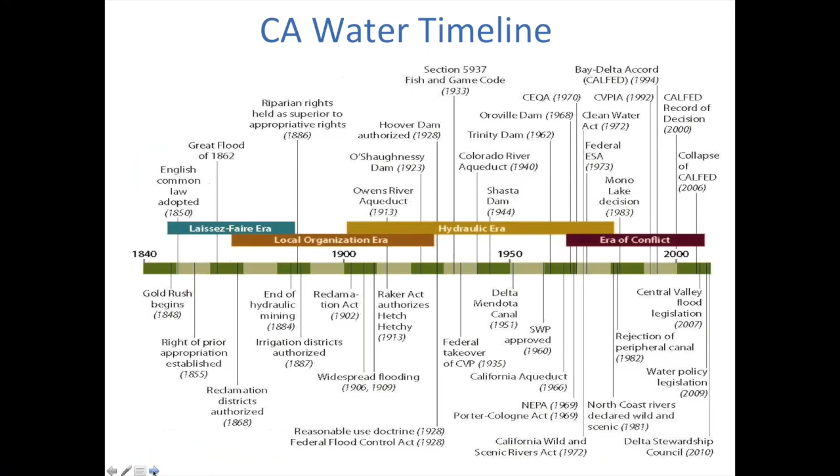Thank you, Danielle. That's a great point. We just keep reusing, reusing, and reusing. So why not now? We do have time for, well, technically we're quite over time, but there are some great questions that were sent in, and I would hate to see them unanswered. So one of them has to do with an environmental justice perspective on water.

The writer writes, the Department of Water Resources is funding proposals for a disadvantaged communities involvement program. It's aimed at addressing issues of equity in water use, water access, and water quality. Could you tell us more about this program or what to expect? Sure, so this is an interesting approach that the state is taking.

So this disadvantaged communities involvement funding is coming through the IRWM program. The state is divided up into 48 regional water management groups. These are governing bodies that came together and came up with a regional plan for managing water. But as I said before, they don't have any regulatory authority. So it's all just based on people choosing to participate.

Historically, funding has come through the IRWM program on a competitive basis, where the state allocates a certain amount of funding to each funding region, which pretty closely follows those hydrologic regions I showed you earlier. Then all of the regional water management groups within each of those funding areas have to compete for some chunk of that pot of money. What they're doing this time with the Disadvantaged Communities Initiative is all of those regional water management groups within the funding area have to apply together for the whole chunk of money. So they're forcing these groups to coordinate, which in many ways is a good idea, because that's the heart of IRWM is to coordinate and collaborate.